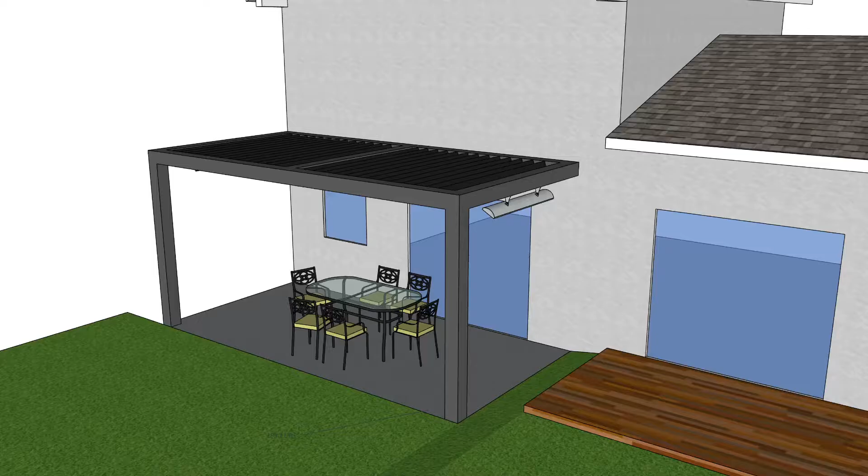Now let's get heating. Alright, so here we have this residential application. Let's go right into the dimensions. I have it at 10 feet tall, and I believe it's 10 feet deep and approximately 20 feet wide. It looks like this is a louvered section patio. There is a structure here in the center for support, and I think that's about it. It's about 200 square feet.

And with 200 square feet, you'd probably want to use something in the nature of 3 units. They did request that I show them how 2 units would work out for this space.

I placed a dining table here in the middle. This is a door that slides left and right, and essentially I placed 2 6,000 watt units. You can see the height here at 8 feet 5 and 13/16 inches. And I have these at 30-degree angles from straight down to 30 degrees. Again, there are 6,000 watt units.

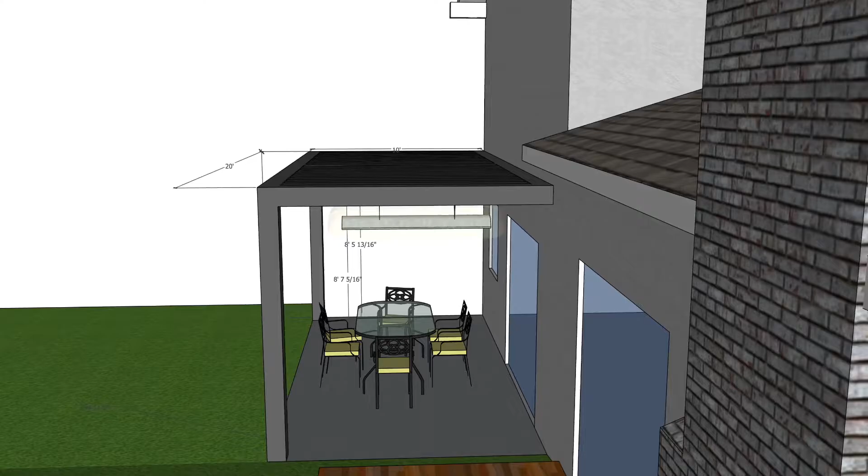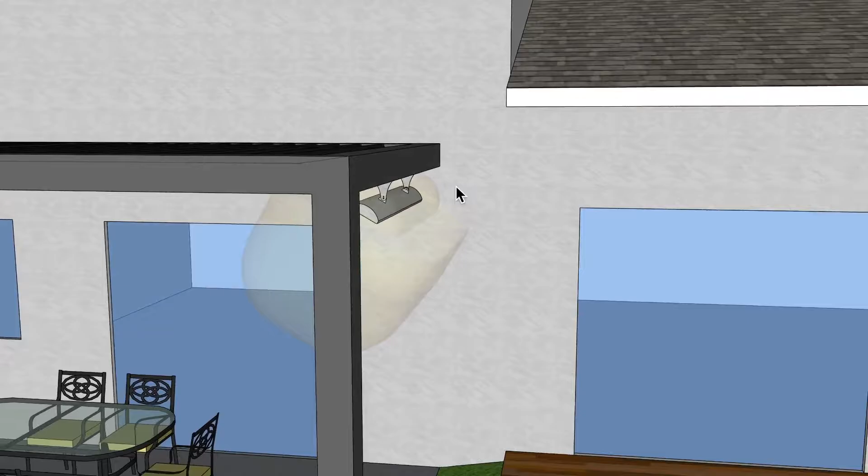The clearances are met with this distance apart. Let's go ahead and just open that up real quick. That's the top clearance, and then the side and bottom clearance. We've got 18 inches from this edge to any combustible surface, and there's no issue here with regards to clearance, even if it was combustible or non-combustible.

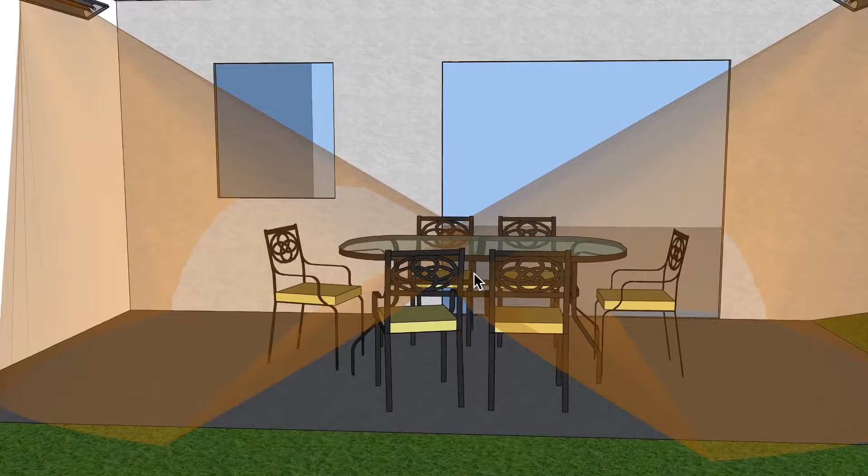All right, so let's go ahead and look at the footprint of heat. You can see here with 2 units, we're getting fairly good coverage. However, the center area here isn't perfectly covered, but you may or may not need that.

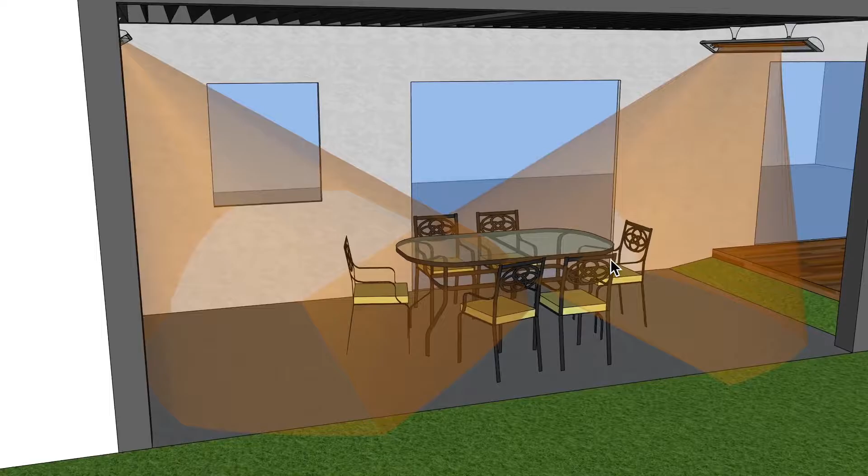I'm not quite sure where this application is. If it's here in Southern California, then this would probably be okay. However, it's not going to be ideal, and that's only because we have just the 2 units on the outer edge, and you're pushing the heat ray as far as it can go. This is about from the center here to the center portion of the heater is about 10 feet, and this is probably coming out another 2 feet further from that center section out to here. So this is not the ideal amount of heat, but it might be acceptable to some. So we'll leave it at that.

Now, what I'd probably recommend is adding a 3rd unit to the center and placing it right here. You can see with the 3rd unit, and I have that pointed straight down. Now you can see that we have this whole area here pretty much uniformly covered.

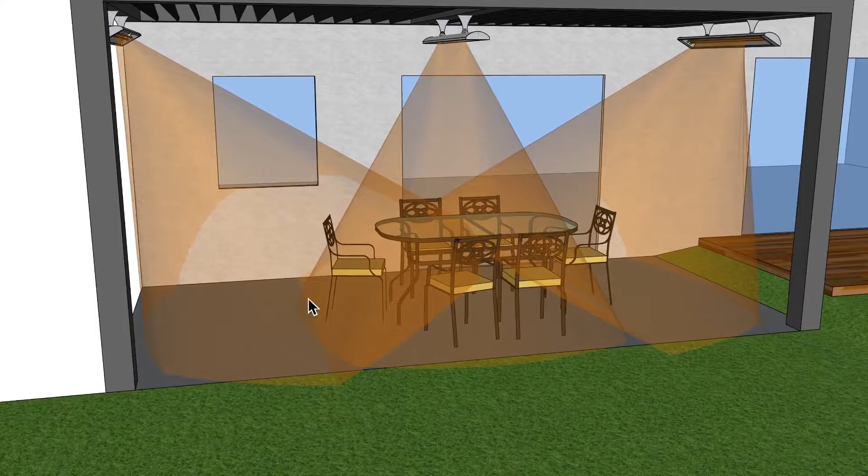This will be a little bit warmer now in the middle than it would be if you were sitting out here, for instance. But if that is the case, you can change this angle here slightly, maybe 15 degrees further down, and same true over here, so that you get more uniform coverage throughout the whole space. And then just looking at this section of the coverage, you can see from left to right there's no issue with regards to coverage. I think that's about it.

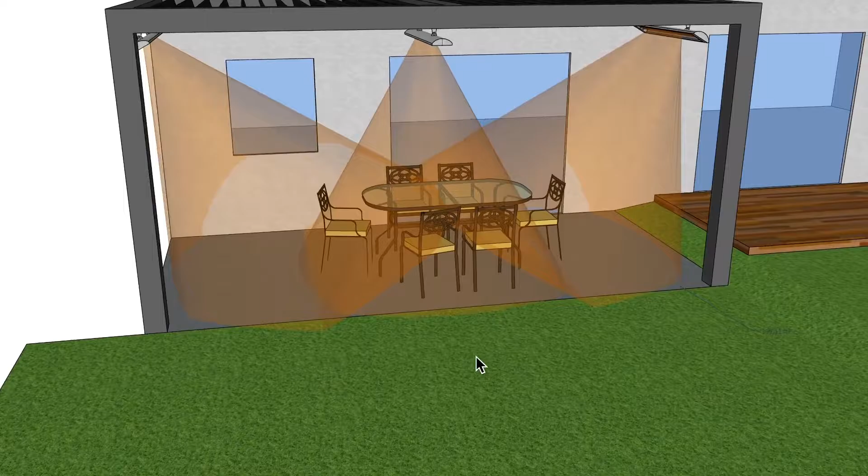I do have this mounted just on the structure itself. These units weigh roughly about 18 pounds a piece, and most structures can handle something of that nature, but you might want to just check with your architect or designer about that, and I think that'll be okay.